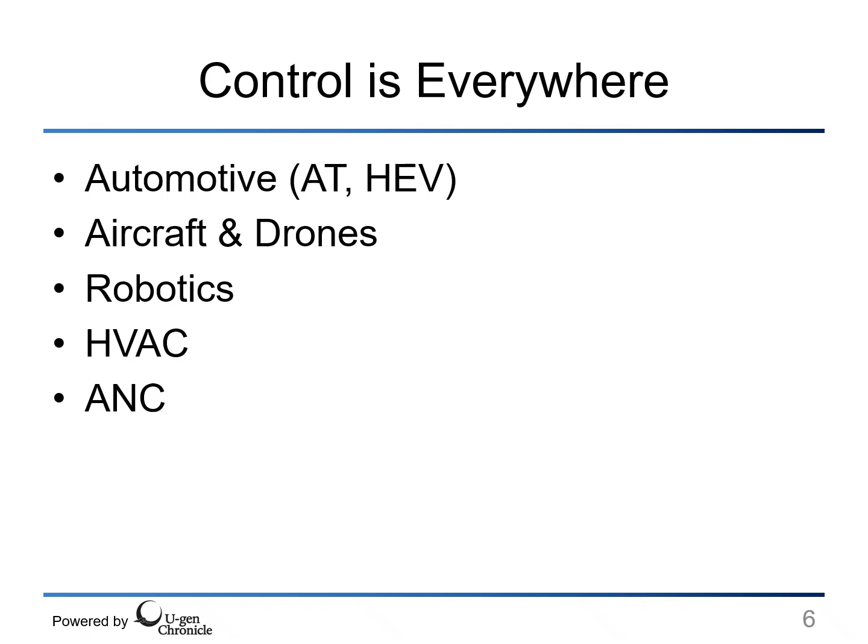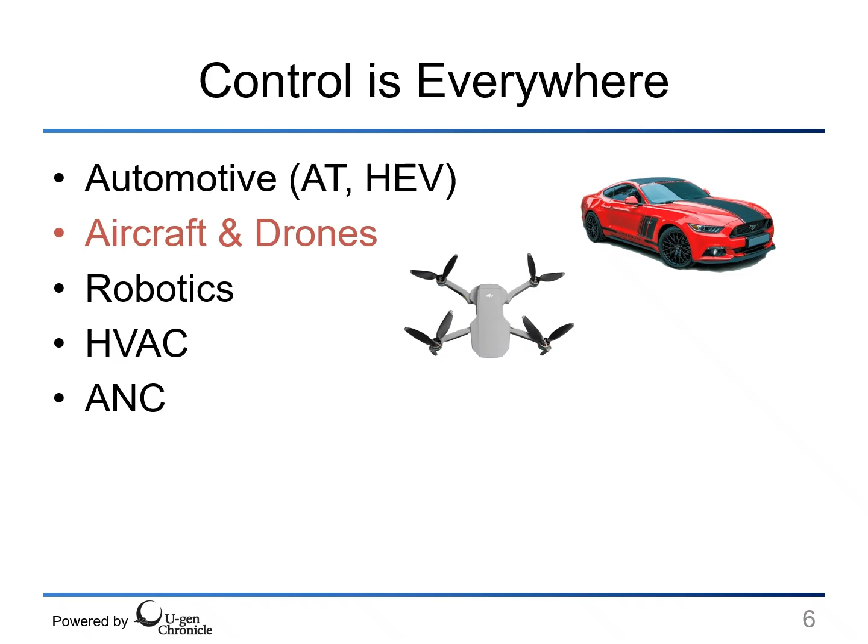Control systems are everywhere. In the automotive industry, they are used in automatic transmissions, hybrid vehicles, cruise control systems, and many other functions. Aircraft and drones rely on control systems to maintain stability, and robots use control to move accurately. Air conditioning systems use control to maintain comfortable temperature. And active noise control systems use control to reduce unwanted sound.

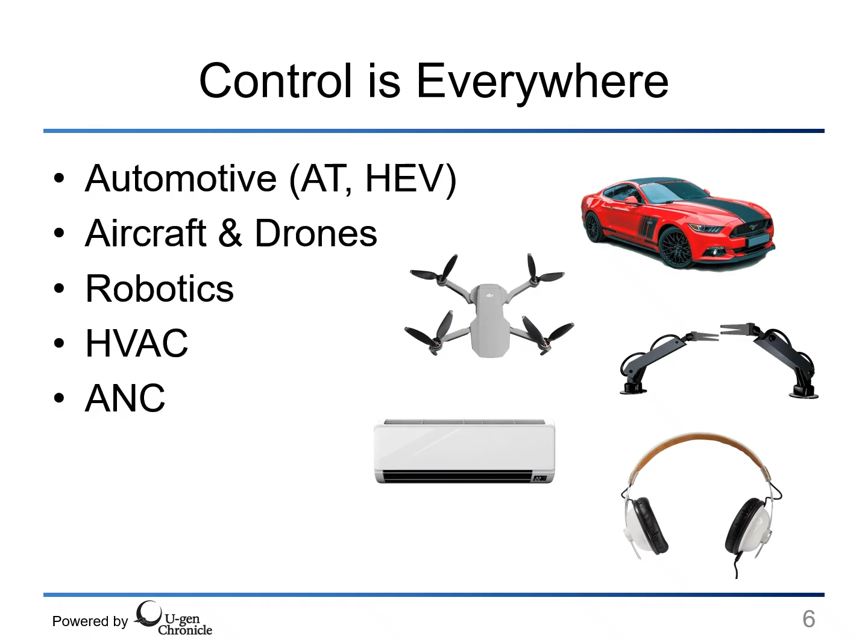These products look completely different, but surprisingly, many of them are solving the same fundamental problem. So what exactly are we trying to achieve by control? One common objective is stabilization.

For example, keeping an aircraft stable during flight. Another objective is tracking. For example, making a vehicle follow a desired speed. We may also want optimization. Maybe we want better fuel economy, higher efficiency, or improved comfort. And finally, we often need disturbance rejection. In other words, we want the system to keep working properly even when conditions change.

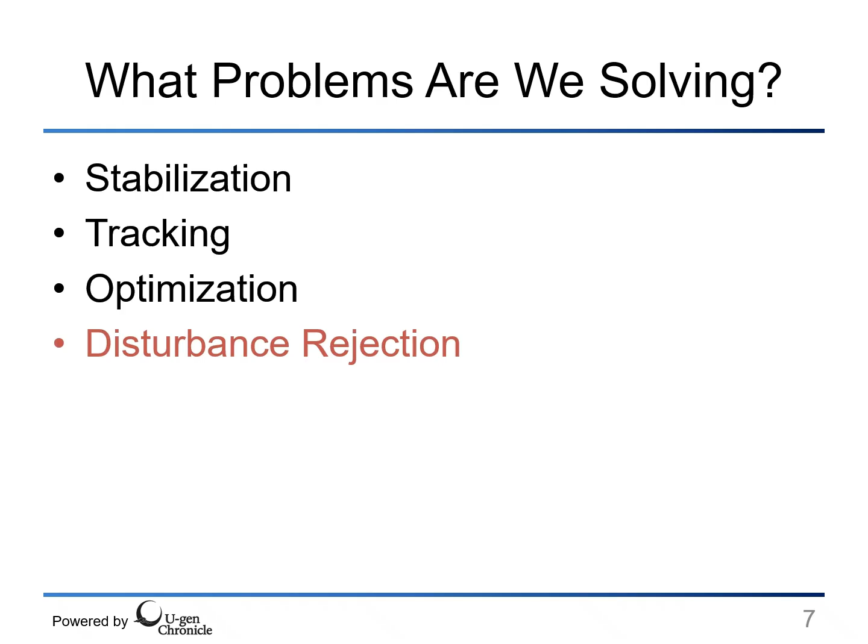Okay, so let's look at a simple example. Imagine you are driving on a highway and you want to maintain a constant speed. Everything works fine on a flat road. But then, the vehicle reaches an uphill section. Even though you are pressing the gas pedal by the same amount, the vehicle starts to slow down.

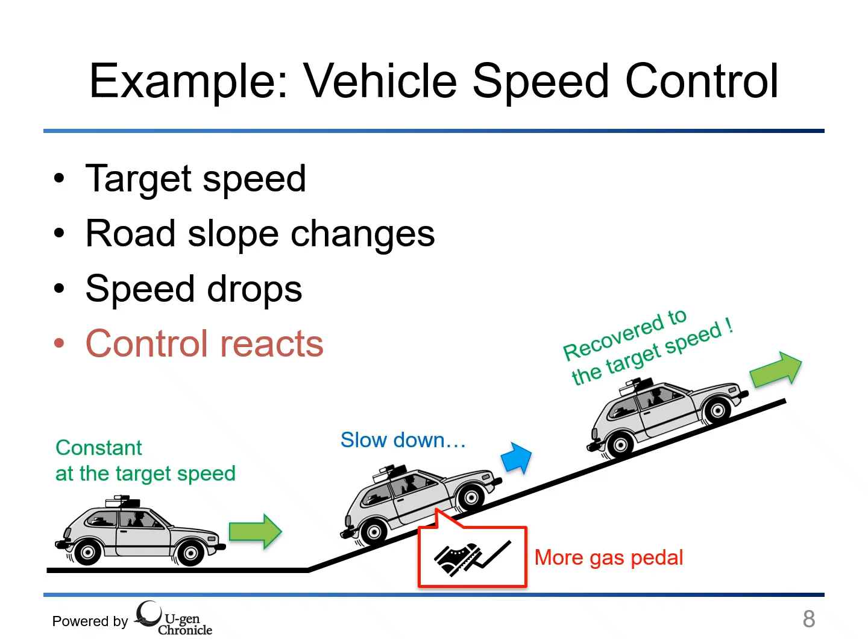So, the environment has changed. The original input is no longer enough, so to maintain the target speed, we need more gas pedal. Then we can keep the target speed. So this is one of the most common control problems you'll encounter.

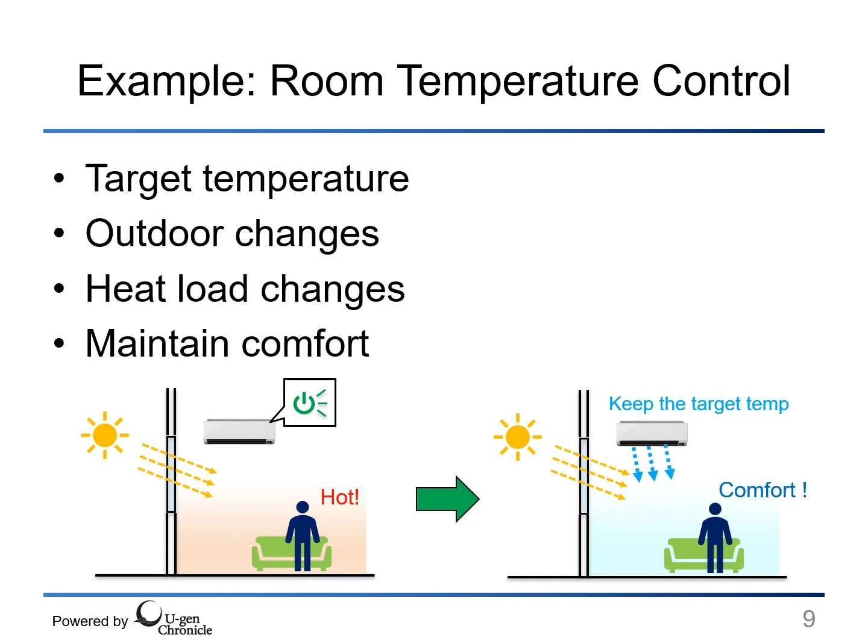Next, let's look at a completely different system. Suppose you want to keep a room at the same temperature. At first, everything is fine. But then, by the sunlight or something, outdoor temperature rises and the indoor temperature also rises. It gets hot. So we turn on the air conditioning system. Then the air conditioner adjusts its output. It looks like a very different product from the vehicle example, but actually solving the same kind of problem.

Okay, now let's look at what these examples have in common. First, we have a target. Next, we apply an input to the system. The system responds and produces an output. However, disturbances and uncertainties affect the result. As a consequence, the actual output may not match the target. This difference is called an error, and that is exactly why control is needed.

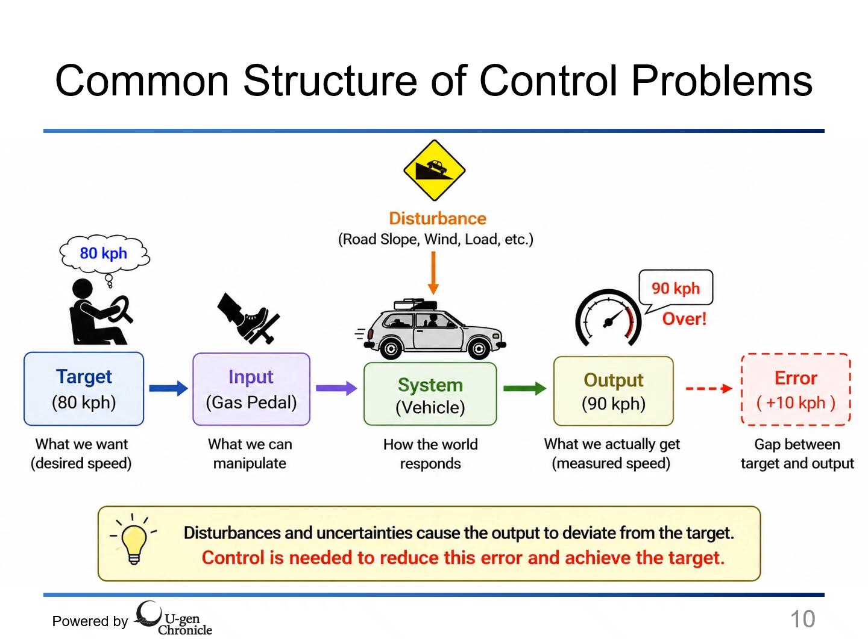The role of control is to reduce the gap between what we want and what we actually get. Now we understand why control is needed. The next question is, how do we reduce that gap?

There are two fundamental approaches. The first one is feedback. Feedback reacts after an error appears. The second one is feed-forward. Feed-forward tries to anticipate disturbances and act before the error occurs. These two ideas form the foundation of almost every control system.